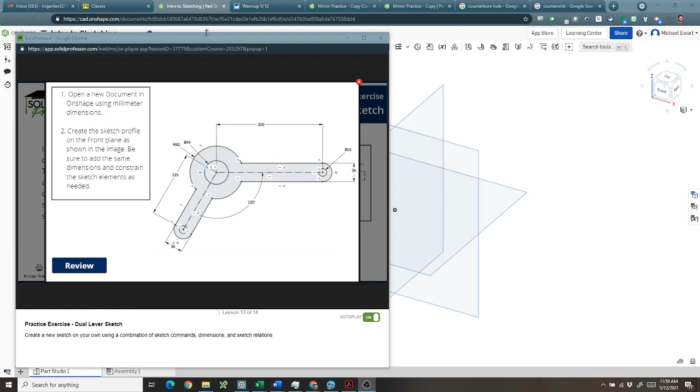All right, so here's the new video for the dual lever sketch. First step we're going to do is open up our OnShape document, make sure we go to our workspace units and change it - default was probably inches. We're going to change that over to millimeters.

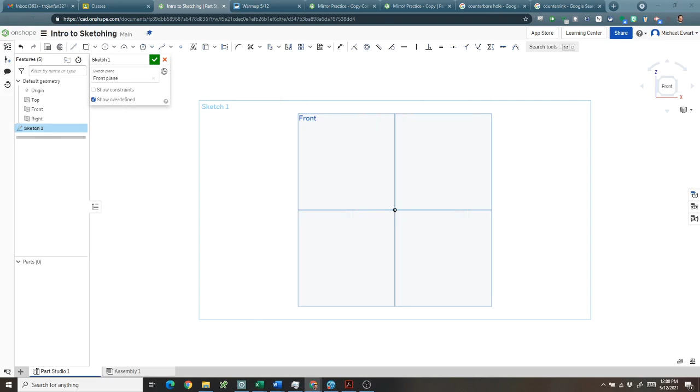Then I'm going to start a sketch on the front plane. I'll click the letter N to get normal. I started this off in the very center - to me it made the most sense to start with the center, this diameter 45. Remember that is diameter symbol, R is radius symbol. So we will go with our circle, and I'm going to start on the center, and I would go with the diameter of 45. Then from there, I decided to choose to make these two lines.

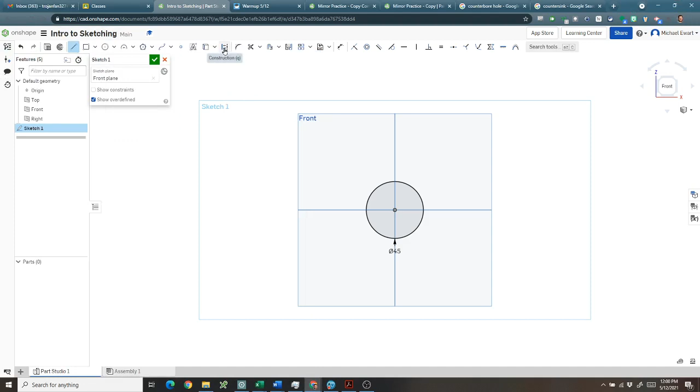And so those are construction lines. One is 200 long, one is 125 long with an angle. So I'm going to go to line, and if I remember right now, I can hit construction. I'm going to click on the center, just go over by 200, then hit escape. Let's do it again, line, construction, start at the center, kind of come down at an angle of 125.

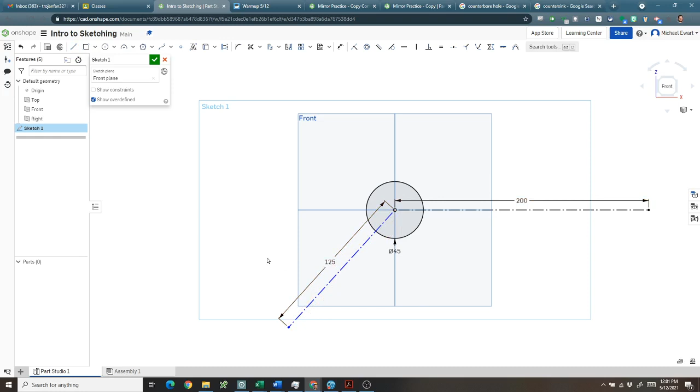And this guy's still blue. The reason it's still blue is I do not have the angle between them, right? There's this angle of 120 degrees between them. We haven't really done much of that, but to get an angle, we go to dimension, and we just click on both of our two lines, the first line, and then I click on the second line, and now it changes it to an angular dimension. So that was 120 degrees.

So now this is fully defined. From here, I'm going to add in the two circles, right? Diameter 15, diameter 15.

So make sure you're clicking exactly on that endpoint. If you're not clicking on that endpoint, it won't turn black. Or if you clicked a little off of it, make sure it's right on that endpoint. Diameter 15.

So from here, now it gets a little bit trickier because these kind of pieces here, they're connecting to this bigger circle. But this isn't quite a circle, it's an arc. I'm going to start this off as a circle, right? It looks like it's a circle, and then we can always trim out these insides later.

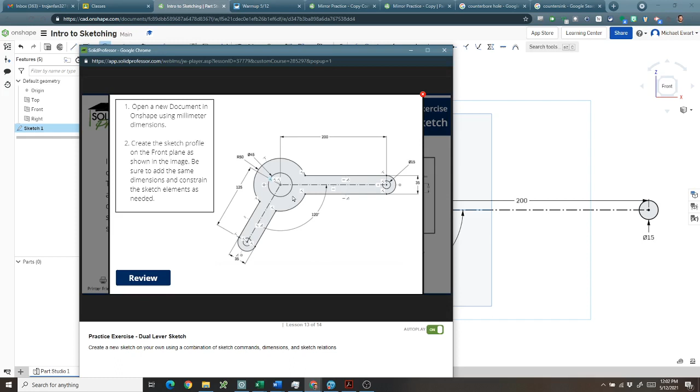So it has a radius of 50, but if I'm starting it as a circle, I want to start on the same endpoint. If I start it as a circle, the diameter would be 100, right? Because we're going with diameters for circles. So a radius of 50 would be a diameter of 100. So there's that bigger circle.

Then I'm going to just go ahead and make the lines. I'm going to start with this bottom one - just going to click somewhere on the circle, just going to make a line coming down here. It doesn't really matter where I make it, just make a line. Then I'll do another one - I'm going to make another line just kind of down wherever.

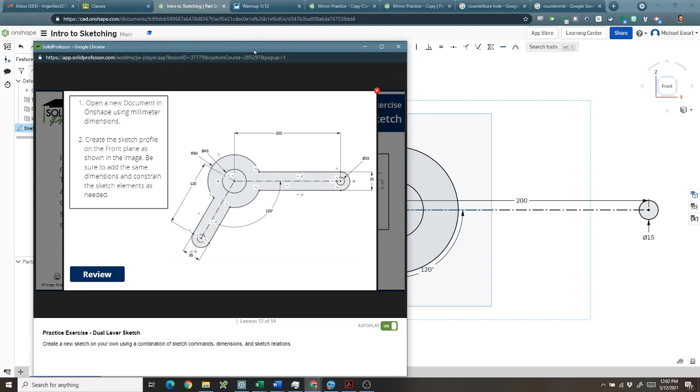And so then when I look at what constraints these have, I see that these are parallel - these lines are parallel. I also see tangent because they're tangent to this arc. So I'm going to go ahead and do that - starting off with parallel. I'm going to make this line parallel to the kind of center line there, and then that construction center line parallel to this guy. Okay, then I'm going to make an arc tool. I just chose the 3-point arc.

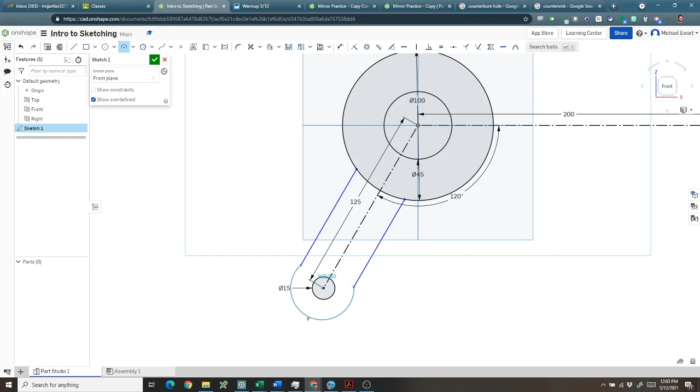You could have done tangent arc as well, but I chose 3-point arc. I'm going to click on this guy, click on that guy, and just make an arc wherever. It doesn't really matter how you make it, because once I make it, then I'm going to add in my tangent.

Right now, if we see, it's not quite smooth, so I'm going to tangent the arc to that line, and it kind of smooths it out. Now this one, again, isn't smooth, it's kind of disjointed there.

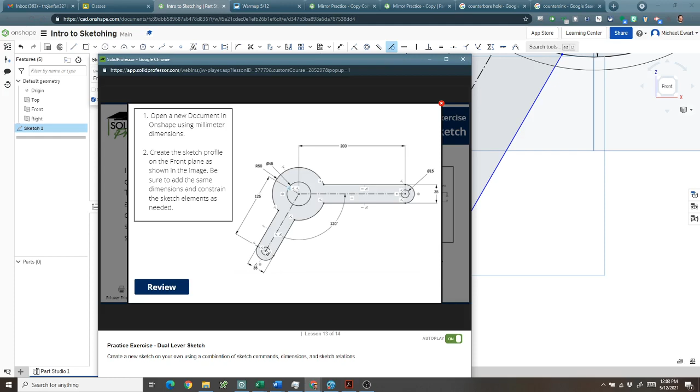I'm going to click on the arc, click on the line, it smooths it out. Now I see this little center mark, right? That's the center for my arc, and it's not concentric with the circle. Well, when I look over here, I notice that I don't see that other center, and I see this little circle. That's a concentric mark. Concentric means that the two circles have the same center.

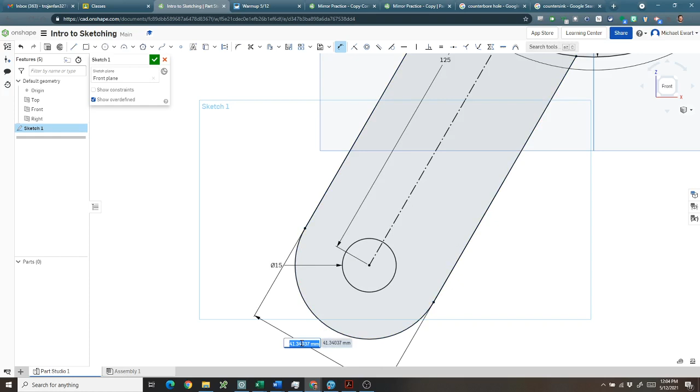So I'm going to click on the center of the circle, click on the center of the arc, and now it's centered those together. It's still not defined, and that's just because I don't have that dimension of 35. So I'm just going to add in that final dimension. I'm going to click on dimension, click this guy, over to this guy, and that was 35. Now it's going to turn black. It's fully defined. Now I'll do the same process up here for this guy.

So I'm going to start off with our line, just anywhere up here, just across. Now this one we're not going to have to do parallel as long as we make these horizontal. So if you make them horizontal, then you don't have to worry about the parallel, right? And notice, see how I see that little horizontal bar? It's not there. When I get here, it's saying, hey, we're automatically adding the horizontal for you.

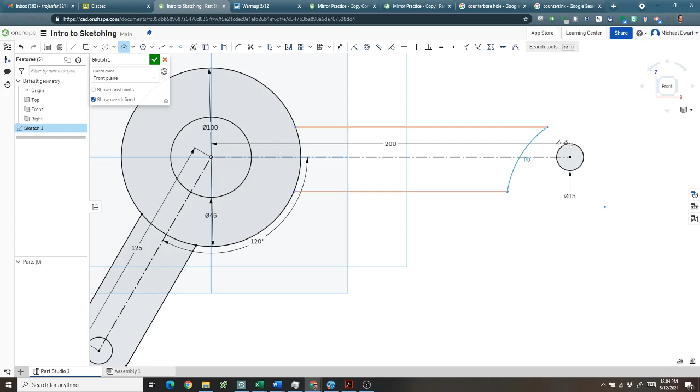And then I'm going to go up to my arc, click on the point, click on the point. Again, it doesn't really matter what I'm doing for right now, however I make it is fine, because I'm going to add in tangent to this guy and tangent to this guy. And it kind of messes it up a little bit, but now it's fixed.

And then I want the circles to be having the same center, so I'm going to choose concentric. Click the arc, click the circle. Now they have the same center. And finally, we will add in that dimension of 35. So most of what we did here was just with the geometry, the geometric constraints, these guys. We only really added one dimension.

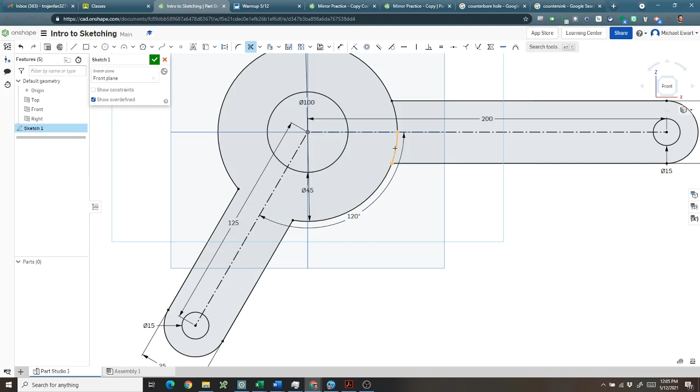So this looks almost perfect. The only difference is I have these kind of insides here, whereas over here, those were cut out. So we're going to use the trim tool, the scissors. I'm just going to trim out those insides. And now this looks exactly how our other one does.

The only slight difference we have is we have this 100 instead of, they had a radius of 50. It's not a big deal. Diameter of 100 is the same as radius of 50. But if you want to make it the same, now that I cut those out, this is no longer going to be considered a circle, it's going to be an arc.

So I could always delete it. It's going to turn blue. And then add the dimension back, and it'll show up as a radius of 50. So if you really, really wanted it to be a radius of 50, you can do that.